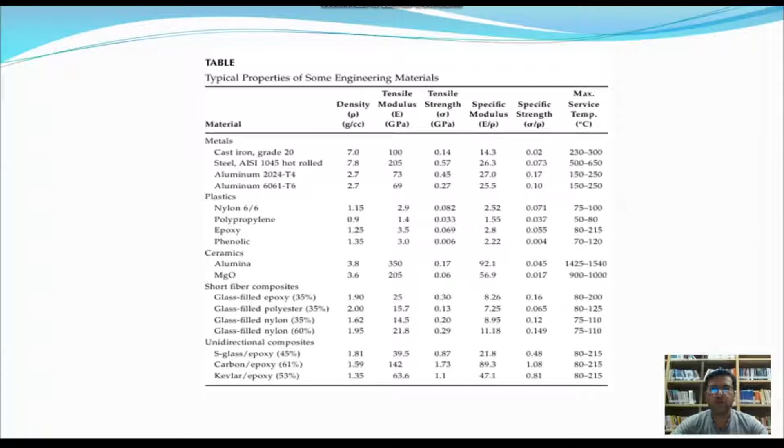Major characteristics on which materials depend: stiffness, strength, density, etc. There are four main categories of materials: metals, plastics, ceramics and composites. Each class contains a large number of materials with a range of applications. Here is the list of typical properties of some engineering materials for your consideration.

Metals have high stiffness, strength, thermal stability and electrical conductivity. Due to their higher temperature resistance than plastic, these can be used for applications with higher service temperature. Alloys are formed by mixing different materials, sometimes including non-metallic elements. Plastics are the most common engineering materials, which provide high surface finish and therefore eliminate several machining operations.

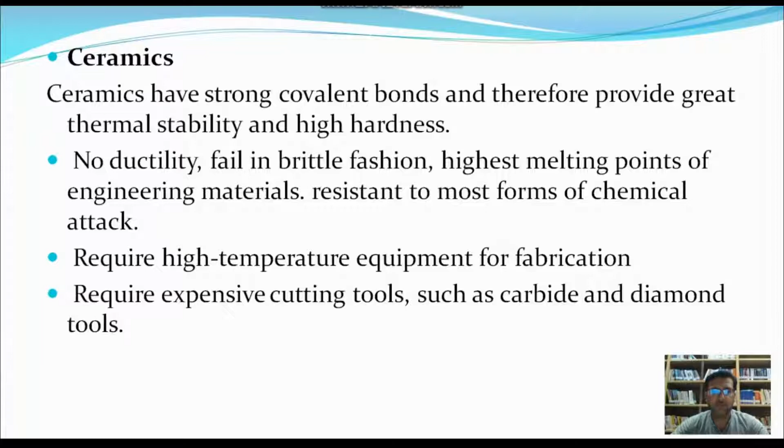Ceramics have strong covalent bonds, great thermal stability, no ductility, fail in brittle fashion, have high melting points, are resistant to most chemical attacks, require high temperature equipment for fabrication, and require expensive cutting tools.

Composite materials are made by combining two or more materials to give a unique combination of properties. The concept of composite is found in nature, for example wood. Scientists found that the fiber taken from a spider's web is stronger than synthetic fibers. Polymer composite materials have a lot of applications in various industries.

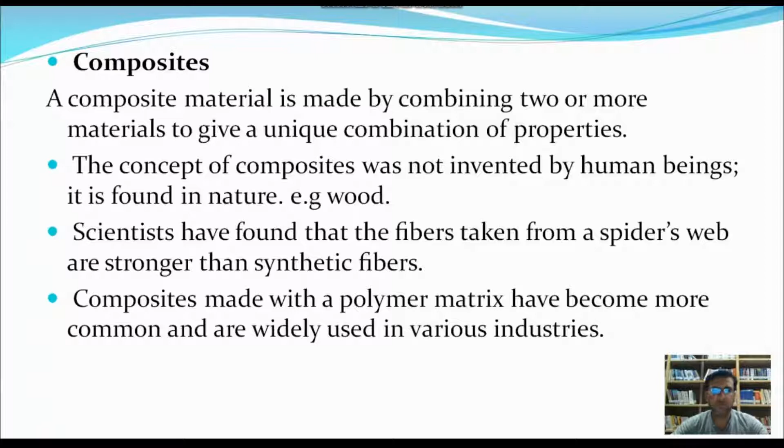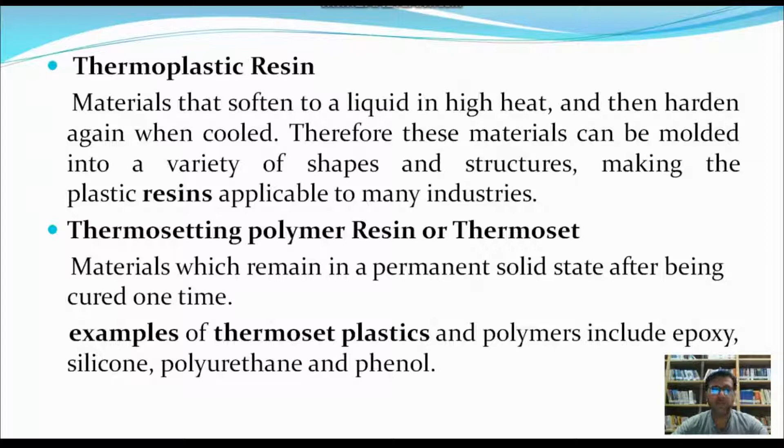Thermoplastic resins are materials which are softened at high temperature and hard when cooled. Therefore, these materials can be molded into a variety of shapes and structures. Thermosetting polymers are materials which remain in a permanent solid state after being cured.

Fiber provides strength and stiffness to composites, whereas the matrix gives rigidity and environmental resistance. Fibers are of different forms: long, woven, short chopped fibers and mat. Each configuration results in different properties. For structural applications, continuous or long fibers are preferred, whereas for non-structural applications, short fibers are recommended.

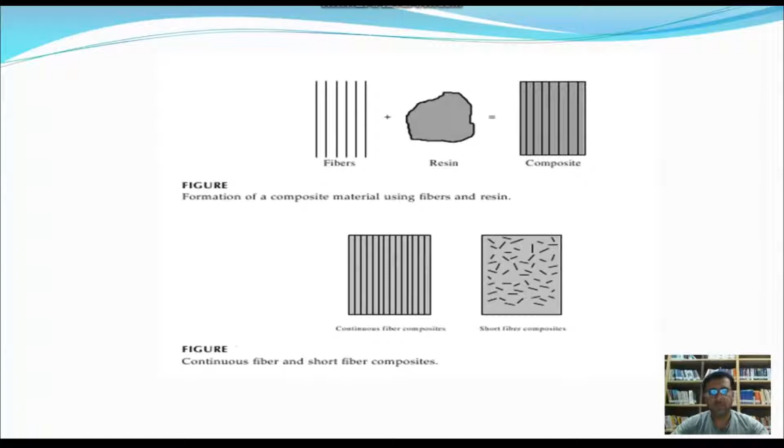Need for material selection. With technological advancement, new material systems and processes are being developed and are growing faster than ever before. It depends upon the demand of the market. For example, the automotive market is driven by cost and energy efficiency, the aerospace market emphasizes high performance and lightweight materials, whereas the sports market demands high performance and lightweight materials.

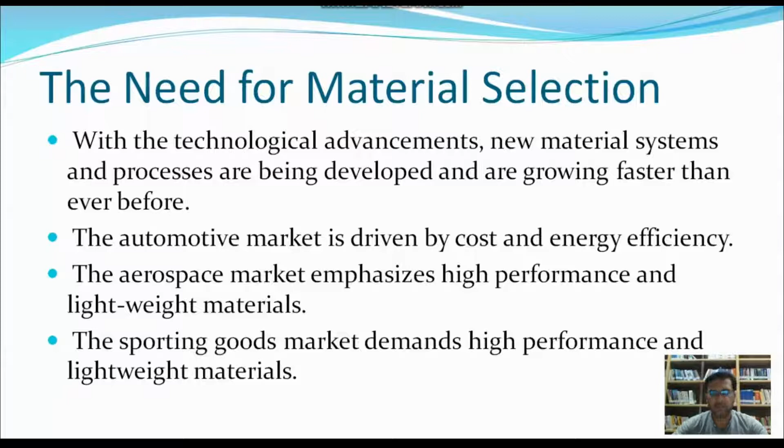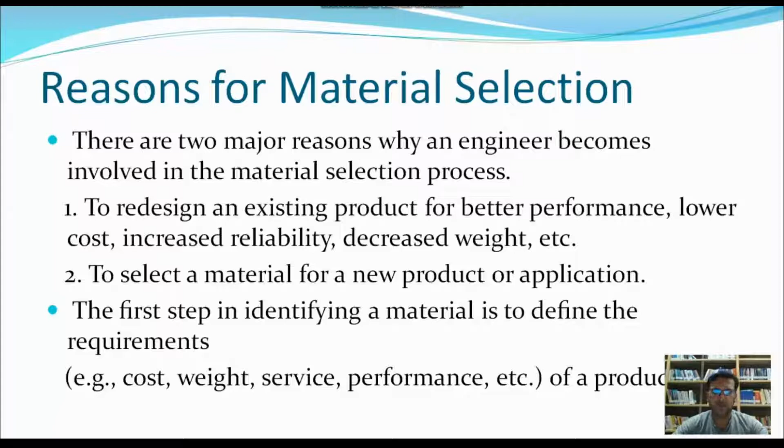Reasons for material selection. There are two major reasons why an engineer becomes involved in the material selection process: number one, to redesign an existing product for better performance, and number two, to select a material for a new product or application. Some requirements that need to be considered during material selection are strength, impact resistance, temperature resistance, humidity, chemical and electrical resistance, process production rate, and cost.

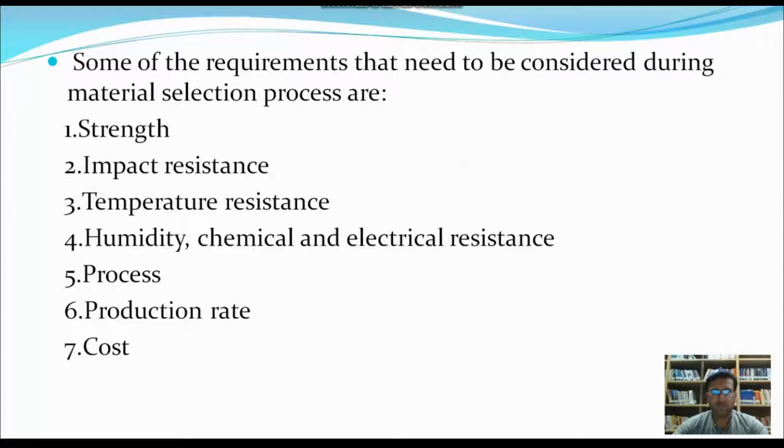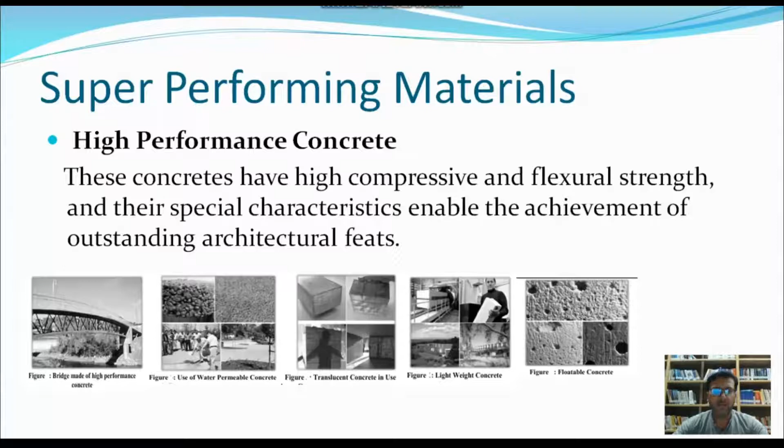Super performing materials: high performance concrete has high compressive and flexural strength. Foamed aluminum, light as air and stronger than steel, is just beginning to shape our world. It has various applications in automotive, marine, military, aviation, transportation and electronics.

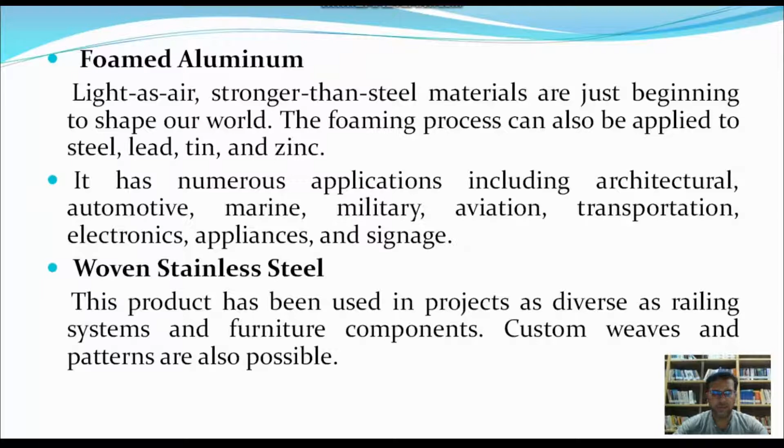Woven steel has been used in projects as railing systems and furniture components. Woven metallic meshes are used as partition elements in public buildings and concert halls. Aerogel is a transparent material that insulates better than mineral wool and is more heat resistant than aluminum. This material has many interesting properties and possible applications such as insulation in windows and solar collectors.

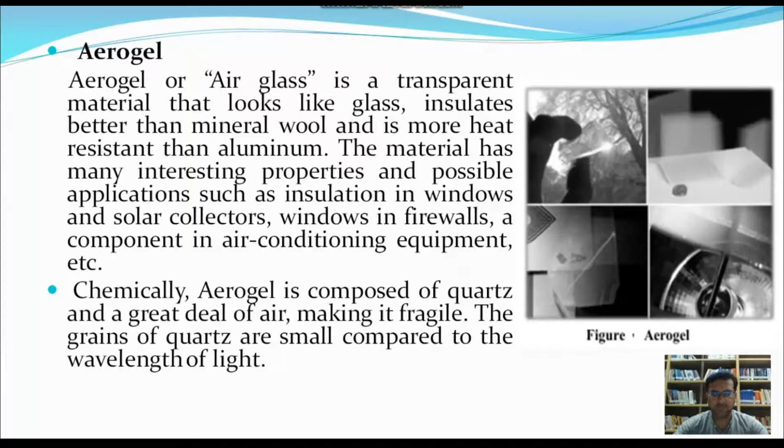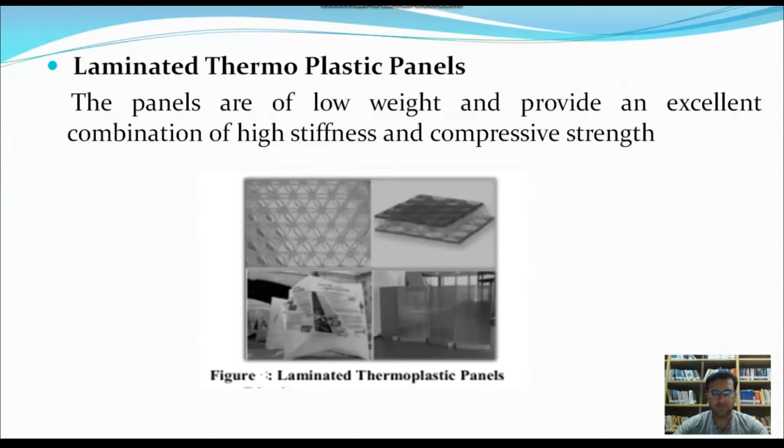Laminated thermoplastic panels are of low weight and provide an excellent combination of high stiffness and compressive strength. Other super performing multi-purpose materials are GeoWeb, Aeroform, aluminum, flexible framing track, 3D molded plywood, corrugated glass, and brittle tiles.